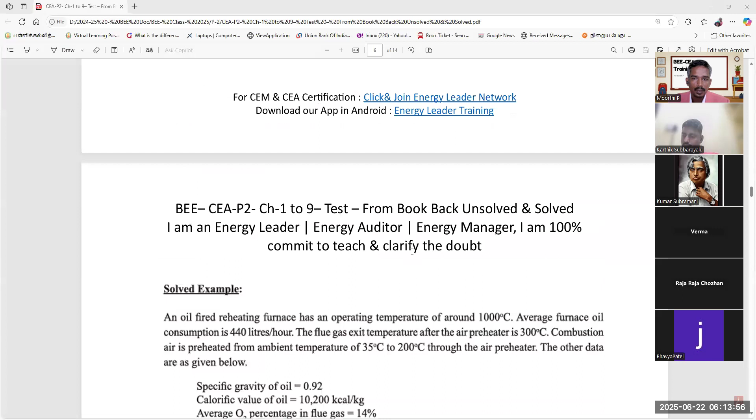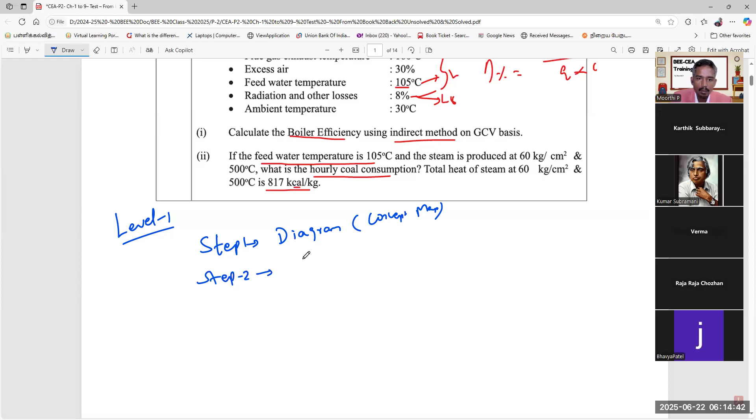Yes sir, yes. Step 1. When you read, we have to follow 3 steps. This is level 1. We have to create level 1, level 2. So step 1: diagram, that means concept map. Step 1, step 2. Mark the data. Step 3, write the whole formula.

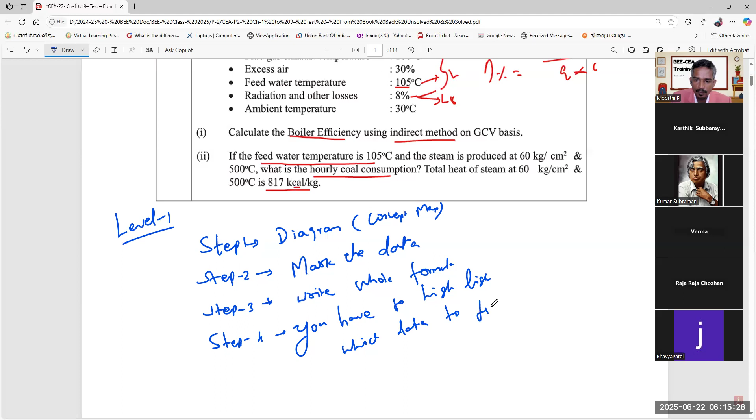Step 4, you have to highlight which data to find. This is level 1. Do you understand? You have to write the whole formula. Step 4, you have to highlight, no? You have to highlight which data to find. It's very important, no? The 4th step you have to follow. Level 1. So level 2, for each question, after once completed, level 2 is the second round.

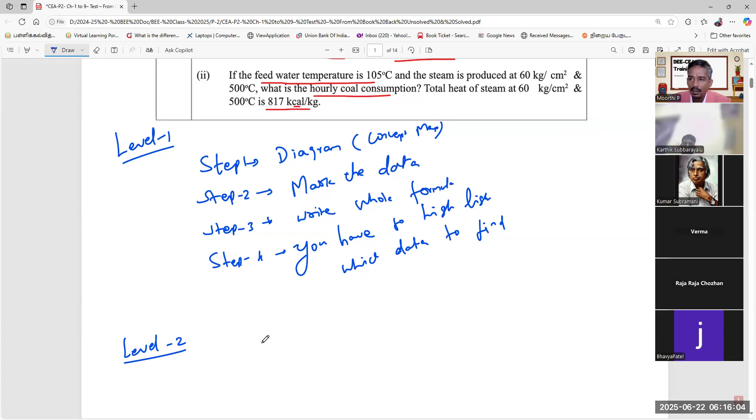You have to do, what do you have to do? Second round. Second round, what do you have to do? Using a calculator, do the calculation.

Step 5. First, you have to understand, to find easy data or which one is mandatory to find, to calculate the next process. Using the calculator, do the calculation to find easy data. Which one is easy? You can find it quickly. Or which one is mandatory to find, to calculate the next process, next step. We have to follow the next steps.

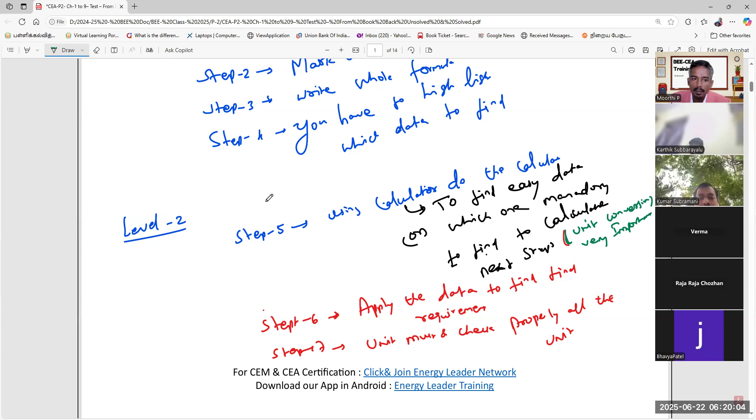So unit conversion is very important. Clear for level 1, level 2? Okay, first round, this is round 1, you have to follow this. Round 2, second time you have to follow, this is why I am telling you now. Once you do step 1, step 2, step 3, step 4, automatically you move to the next calculation. So what will happen? Your mind is always working on the next process. Do you agree with this? Your mind is always working on what we have to do next, other processes. Same thing keeps going on. So level 2, you have to do it. Level 3, I will do the calculation. If you can't find it, I will do that. Only level 1, level 2 each, you have to make it like this. Everything simple, make it simple. Clear? Okay, so I will explain the simple concept for each question.

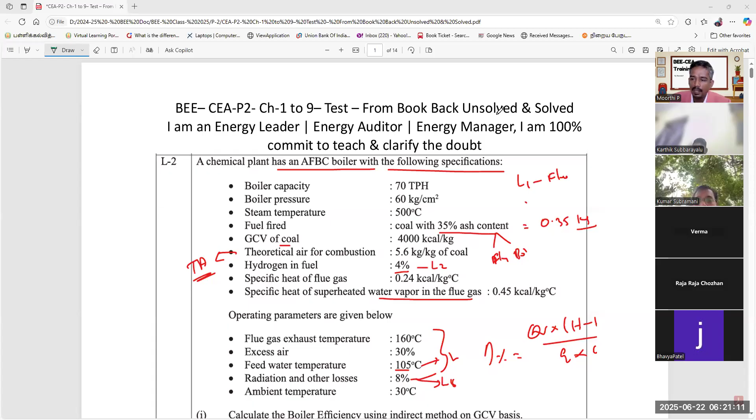Okay, this is already chapter 1 to chapter 9, this is a book calculation. I have already explained this one, so I will explain it again. The chemical plant available is an AFBC boiler with the following specification. What is the capacity? This is 70 tonnes per hour, means Q. This is the pressure, this is the steam temperature, no? The fuel fired has 35% ash content. Okay, they only give the ash content, they don't give any data for fly ash or bottom ash. Do you agree with this? So gross calorific value is given, theoretically, no, TA? Hydrogen in the fuel is given, no?

What do you have to find out? Anyone tell me quickly? Verma, Raja Raja Chozhan, Patel sir, Karthik. Hydrogen in the fuel, that.

Only we have to find out the hydrogen in the fuel. Okay, clear? Next one is the specific heat of flue gas, 0.24, and the specific heat of superheated water vapor, this CP. This CP is used for flue gas.

Flue gas, this is very important. You have to find out heat loss for flue gas. Operating temperature given na, flue gas exit temperature. Is that TF na? Yes, T is TA. Excess air given na, EA, percentage excess air.

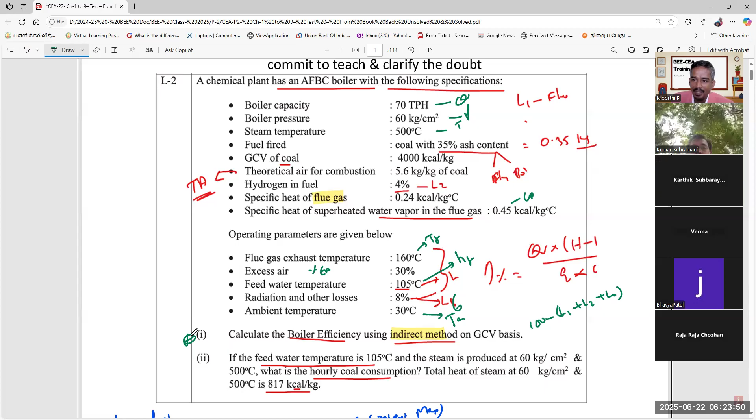Yes, they are asking, if you see the boiler efficiency, you have to find it. Simple calculation: if the feed water temperature is 105, same feed water temperature, and the steam produced is 60 kg per centimeter square at 500 degrees Celsius, what is the hourly coal consumption? The total heat of the steam, what is the heat of steam? 817 K calorie. What is the formula you have to apply na? Boiler efficiency = Q x (H minus HF) divided by Q x Gross Calorific Value.

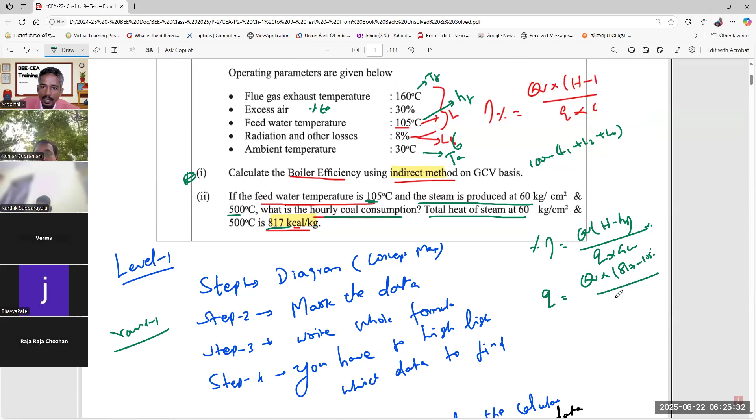So you find out na, indirect method boiler efficiency. Only they are asking Q. Clear? Yes, so Q steam, what is the steam? Q, this is Q na, 70 ton per hour. H is 817 minus HF, what is HF? 105. So divided by gross calorific value, how much? 4000 K calorie. Boiler efficiency, how much?

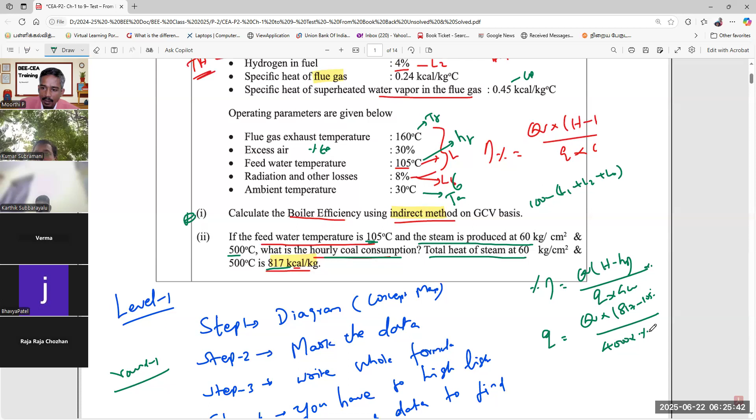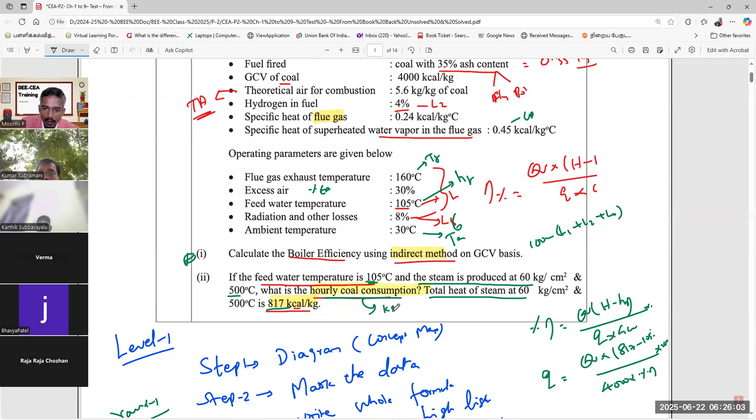Whatever value you get, you have to make it, okay, multiplied by 100, simple you can calculate Q. Okay, this is what is the main unit? Unit very important na, what is unit? What is the unit? Kg, kilojoules per kg, yes kg per hour.

Kg per hour, so because they don't give anything about operating hours. Okay, first question you can do it now quickly. Now you get clarification, yes sir. Okay, every time you have to reference. If you already know that, no issue, you have to make it very fast. Do you understand na, you have to make everything very fast.

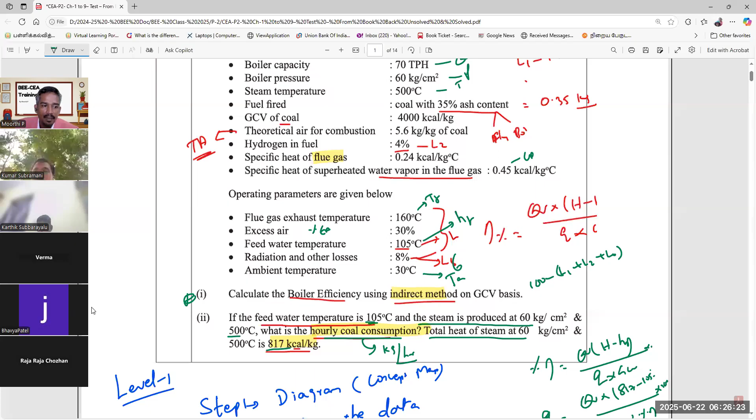So next question: the oil-fired reheating furnace has an operating temperature around 1000 degrees Celsius. This is a furnace na, correct. Okay, average furnace oil consumption 440 liter per hour. So once you read, what do you have to do? Conversion, what is the main point? So always remember, for every question, unit conversion is very important. What is important?

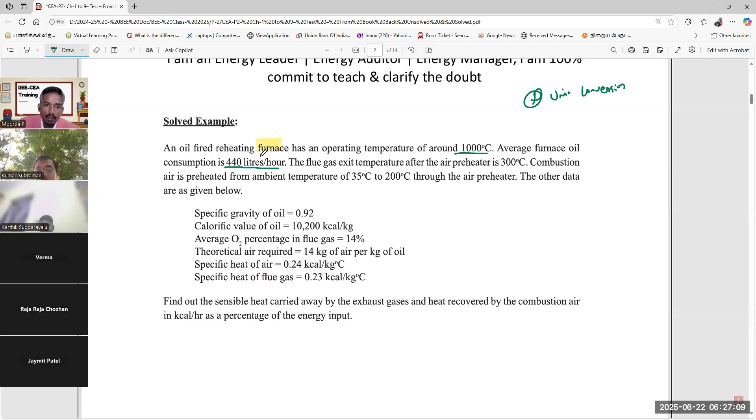What is important? Unit conversion. Unit conversion, now you understand na, you have to convert na. Convert, unit convert to kilogram per hour. Yes, multiply by the specific gravity. The flue gas exit temperature, air preheater. After the air preheater, what do they do? After the air preheater, so 300 degrees Celsius.

Okay, combustion: the combustion air preheated from ambient temperature 35 to 200 Celsius through the air preheater. Other data given, what are the data? The specific heat given, calorific value given, O2 value given, theoretical TA given na, TA.

So once you read the TA, what is the purpose of TA? Tell me quickly, what is the purpose of TA? To find surface heat loss. To find theoretical air, so what, to find the automatic...

Yes sir, theoretical air, what are the requirements? Everything you have to find out na. Theoretical, what is the main purpose? Once you read the theoretical air, this is where they use a simple equation using actual air supply na. The actual supply is used to find flue gas mass. So everything follows a sequence. So same with excess air, what is the purpose of excess air?

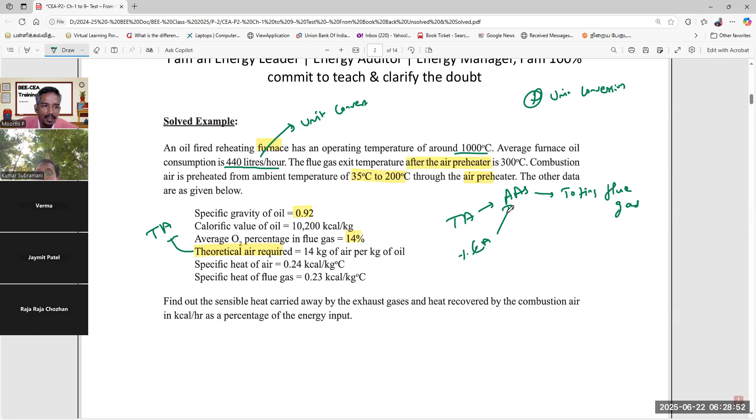First excess air. Once you read the excess air, what you have to understand? This is useful to find out the actual air supply. It is helping, both need help. Then only you can find out the actual air supply. Then going for to find flue gas.

Clear? The specific heat of the air. They given the air. Are you understand? They give separately air, flue gas. You have to understand 0.24, 0.23.

So find out the sensible heat. What is the sensible heat? Tell me quickly. See, everyone need to answer, very important. MCP delta T. Yes, what is sensible heat? A bit change in temperature that causes.

Yes, that means increase the temperature for air carried away by exhaust gas. So flue gas always giving sensible heat. Okay, next, heat recovered by the combustion air.

Find out the sensible heat carried away by the exhaust gas. They asking sensible heat carried away, and heat recovered by the combustion air, in K calorie. As a percentage, you have to calculate. How much percentage? Now clear?

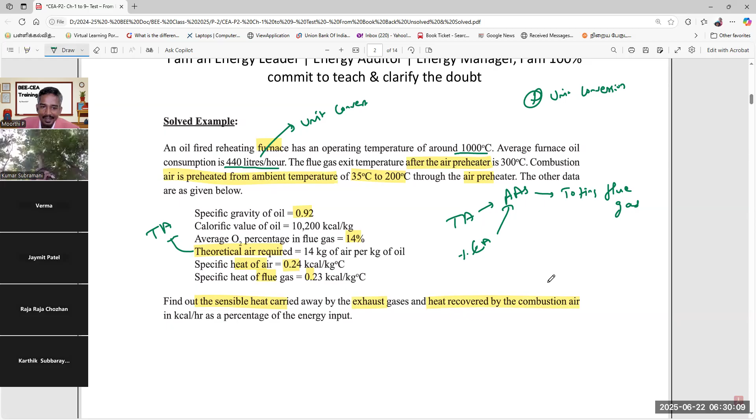How to calculate? Two things you have to calculate. What is the two things? One is sensible heat. So what you have to do? Draw the diagram now. So first step, what is the first step?

The one question I will explain. What is the first step? Draw the diagram. Draw the diagram. Yes. This output.

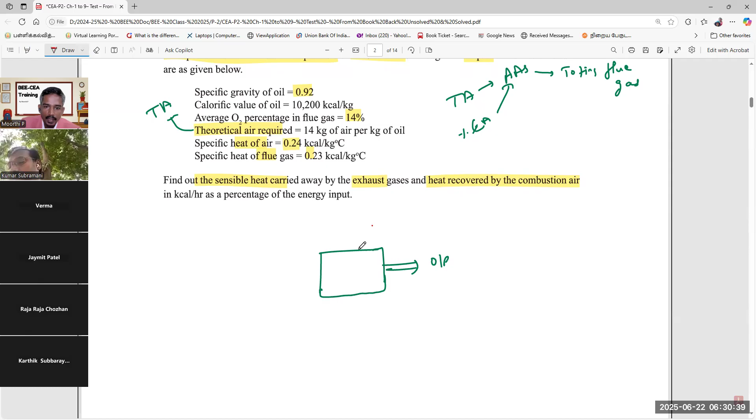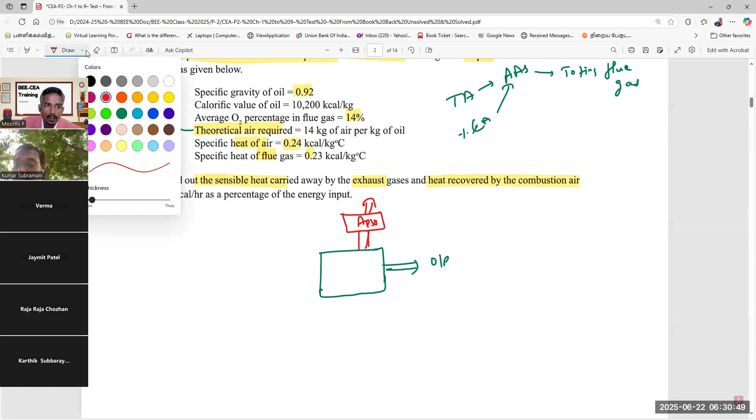This is a flue gas. This is a flue gas. Here is an air preheater. This is going out. The furnace, F. I am giving the fuel input now.

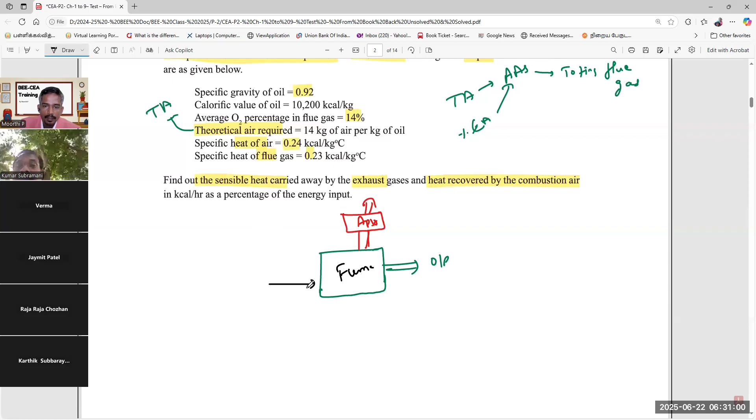First step, you have to draw before air preheater, after air preheater. Are you understand now? Okay. Before air preheater, after air preheater. It's very important. Before air preheater, this is after air preheater.

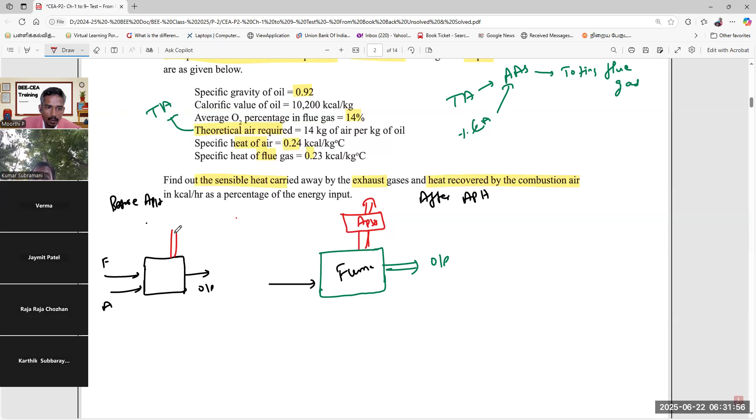The fuel, air, flue gas. What is the temperature? Operating temperature 1000 degrees Celsius, for the furnace. Yes, that means flue gas temperature how much?

Here? 300 degrees. Clearly you have to tell. Oil fired furnace operating temperature around 1000 degrees Celsius. 1000 degrees Celsius.

Inside 1000 means before air preheater. This is also 1000 degrees Celsius. Yes. Okay. Next one, what you have to do? After furnace, they install the air preheater.

This is data, but generic data. This is generic data. This we have to understand. They install the air preheater. They are giving the fuel. So output going on to air preheater. Now the temperature, the average furnace oil consumption is 440 liters.

The flue gas exit temperature after the air preheater, here is the temperature, how much? 300. Okay, this is TF. Any doubt? This is TF. It's after. So what do you have to make it?

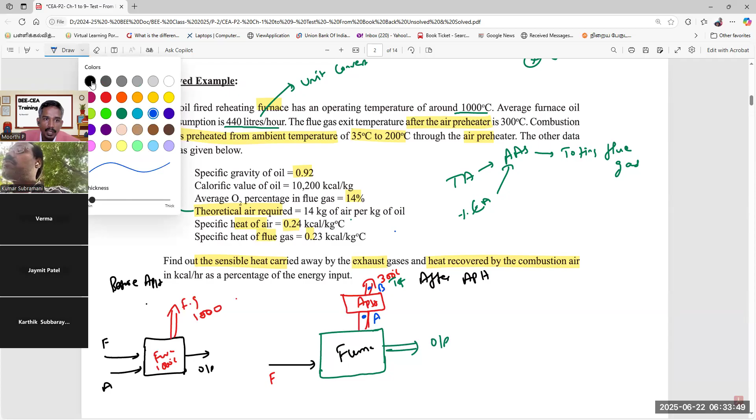What is the purpose of air taking? They are giving here, this is air. This air in, air out. This is also same, na? A point, B point like this. Potential difference, same like this. In, out.

So what is a flue gas? Now here both are mixing, na? Not mixing, the connection. What connection is available here? In the air preheater, flue gas and air connection available, the heat transfer available. Flue gas.

Heat loss equal to heat gain. So which one is the heat loss? Anyone tell me quickly? Already done this calculation, I explained. Flue gas is heat loss. Heat loss, flue gas. Heat gain, yeah.

Okay, what is the temperature of the combustion air? Preheated. How much preheated? 35 to 200. So what is it? This is T1, 35 degrees Celsius. What is T2? Here output 200. Okay, the other data given.

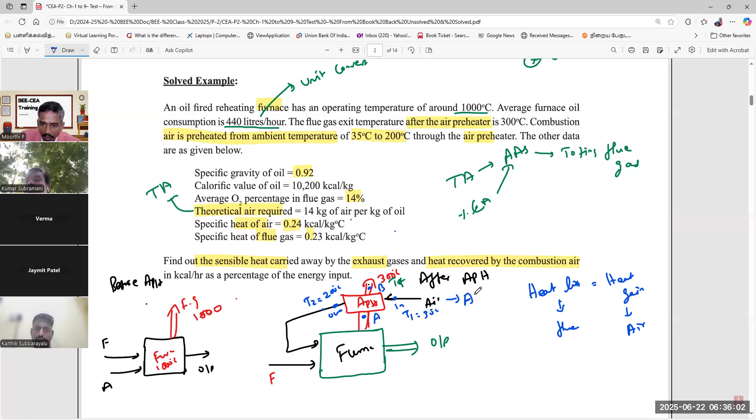Yes, here you need to find out mass of air. Are you understand? This is you have to find out the actual air supply. Here flue gas, you have to find out flue gas mass. Mass, MF, this you have to find out. MA you have to find out. Clear? Oil already did, na?

Already what is the oil? 440 liter per hour. This is what you have to do. Tell me quickly, kg per hour. Yes, kg per hour. To find out kg per hour, unit conversion, fuel conversion, kg per hour. Next, what you have to do?

This is data complete, na? Data, yeah. Step 1, step 2 completed. Level 1, step 1, step 2 completed. What is the next step?

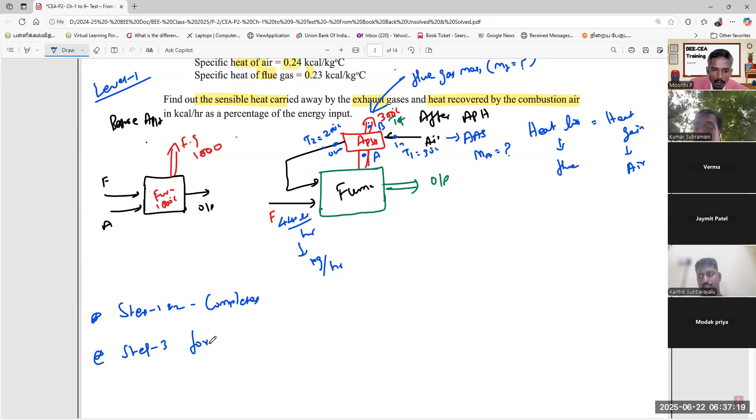Step 1, step 2 completed. Formula. Step 3, formula. So what is the whole formula? Just write whatever formula is available. Simple way: heat loss equal to heat gain. So air heat gain equal to M air into Cp into T2 minus T1, delta T. The simple formula: M Cp delta T.

So what is the other formula? For flue gas, you need to find the O2 and heat loss. MF into Cp into same delta T. Same, you can make it.

Here is a very important instruction, after the air preheater. This instruction says: find out the sensible heat carried away by the exhaust gas. How much carried away? Here 300 degrees Celsius. This is everything after preheat. So this is 300 degrees Celsius. What is the ambient temperature? That is distributed here. This is the loss: TF minus TA. This is after the air preheater. So in this case, one temperature has to be 1000 degrees.

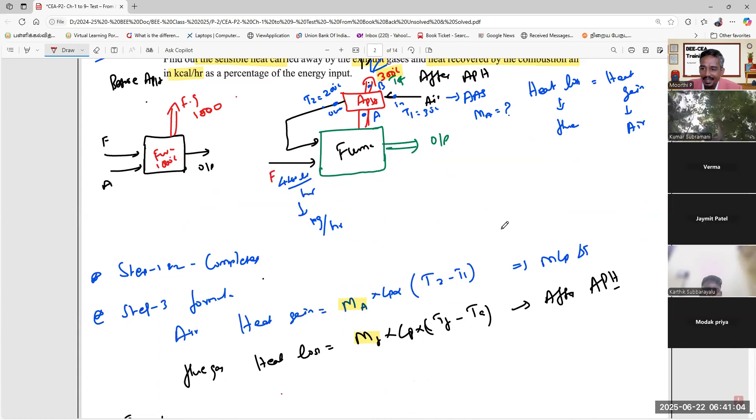Karthik, understand or not? If you understand, tell me yes. Otherwise, not understand - that also very important. Okay sir, just I okay, need to solve - only understood the concept, sir. Okay.

Okay, step 4, what do you have to do? Calculate the mass of air and flue gas. Yes, MA and MF, clear? MA and MF, how to calculate? Mass - so you've done a lot of calculation: theoretical calculation, actual air supply calculation.

The data already given is theoretical air. Yes sir. Then why are we getting, what is the mass of air? Actually, the supply is equal to theoretical air into 1 plus percentage excess air. Mass of air means the actual air supply. Clear? What is the meaning of actual air supply? Theoretical air into 1 plus percentage excess air. So percentage excess air - this is what we have to do.

Okay, what is the next one? Mass of dry flue gas. This is complete, na? Mass of dry flue gas, how to calculate? This is everything: actual air supply plus 1. This is everything for 1 kg fuel. So total mass of air, how to calculate total mass of air?

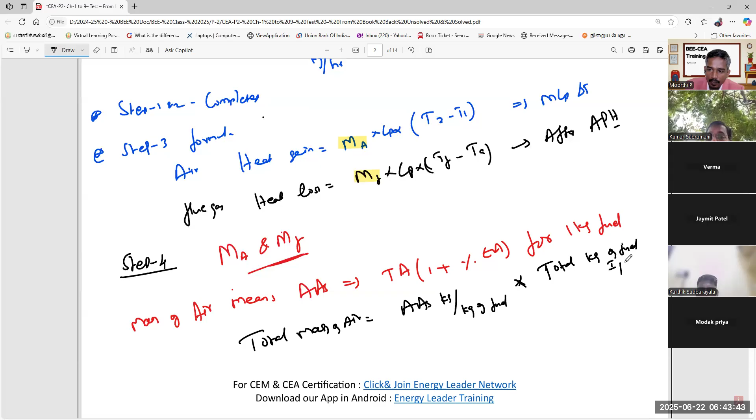Multiply by the mass of fuel. So actual air supply, kg per kg of fuel. Kumar sir, are you understanding that, sir? Kg of fuel. Sir, yes sir. And kg of fuel - total kg of fuel, fuel input. So next, what do you have to do?

Mass of dry flue gas. So how to calculate mass of dry flue gas? Total mass of dry flue gas equals 1 plus actual air supply. Mass of dry flue gas equal to: always remember, actual air supply plus 1, into total kg of fuel input.

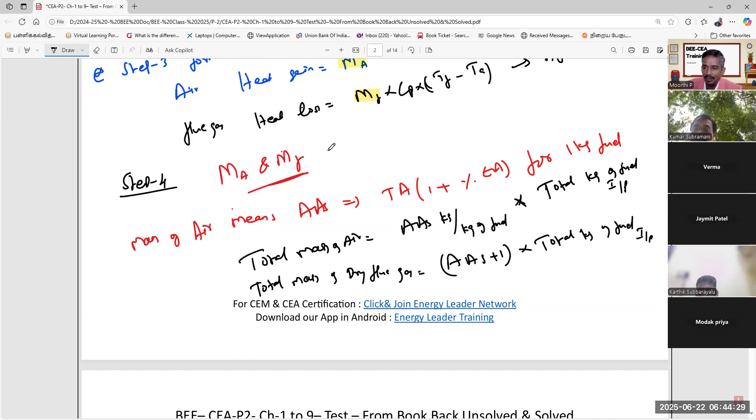Then next, what do you have to do? Difference - we have to find it. Simply you have to apply M Cp delta T, you have to calculate, and you have to find a percentage of energy input. Do you understand the percentage of energy input? How to calculate the percentage of energy input? What is energy input?

Q into GCV - yes, this is energy input. How to calculate the percentage? Any idea? Difference divided by input - yes, the percentage of heat loss, heat gain for air equal to heat gain divided by input energy into 100. This is the simple calculation for both.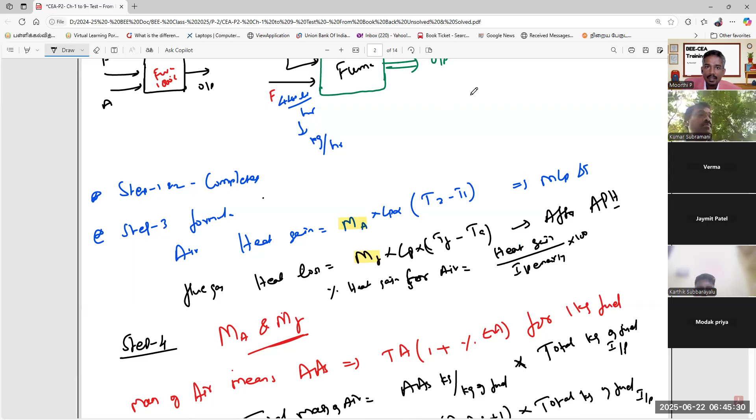Now finish everything. If you understand what is the flue gas, what is the theoretical air, what is the actual air supply, then only you can easily understand, clear. If you understand how to find the actual air supply - theoretical air, they already gave theoretical air, no need to find out now. Modak, do you understand?

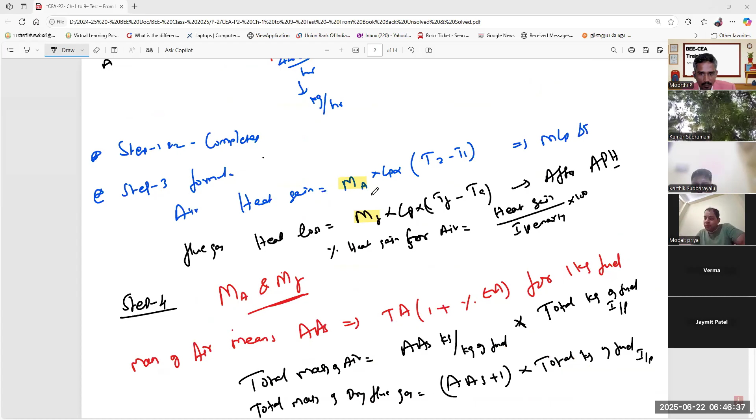You have to find out everything. Yes, so next calculation. Sir, one thing I want to ask, just a doubt. For finding this flue gas MCP delta T, what will be T1 and T2? 1000 degrees and 300 degrees?

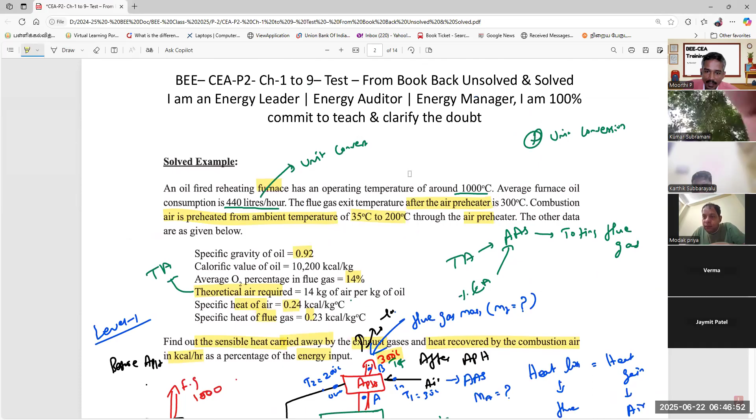Already they have mentioned how much carried away. They mentioned clearly, carried away means by flue gases, by exhaust gas. What is exhaust gas? Flue gas, na? Okay, so what is the carried away?

What is the ambient temperature? 35. Yes. What do you have to do? Carried away is the difference between carried away temperature minus TA, na? Directly going to mixing with the air.

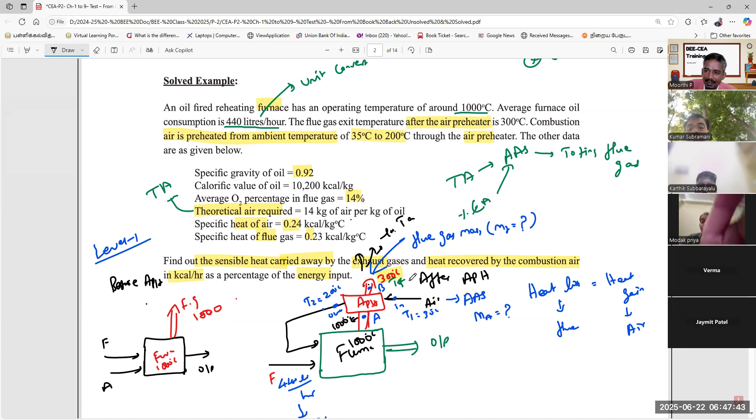This is air preheater. This is flue gas, temperature 300 degrees Celsius. This is directly mixing with air, na? Ambient air, this is TA temperature, so 35 degrees.

35. So why this? Both are mixing, what will happen? Energy loss, na? So why is this 1000 degrees Celsius given?

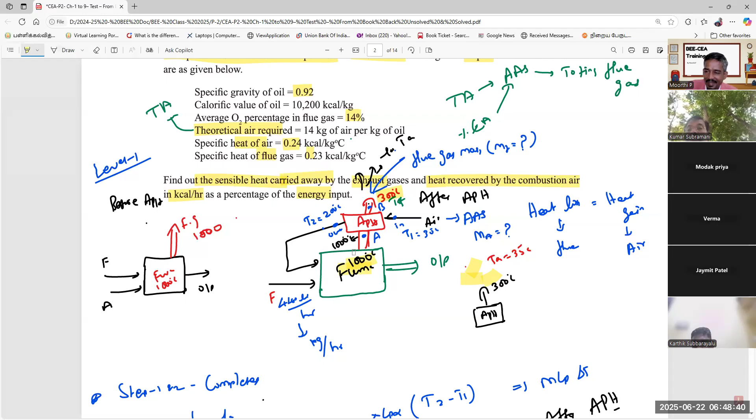They already told, na, furnace operating temperature is 1000. I mentioned here inside, operating temperature. You have to read the question paper: oil fired heating furnace has operating temperature around 1000 degrees. What is the meaning?

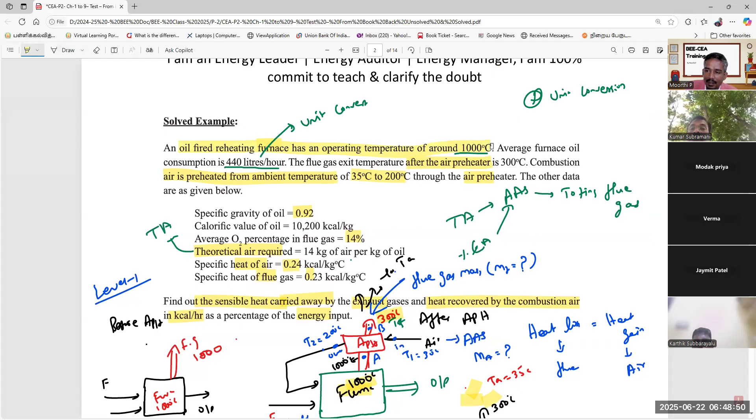The inside temperature is 1000 degrees. Furnace operating is 1000. Here the coming flue gas is 1000. We are inside the air preheater. Then after the air preheater, it exits at 300 degrees Celsius.

This is carried away. If you consider before air preheater, without air preheater, you can find out how much energy loss by carried away by flue gas.

1000 minus - without air preheater, what is the flue gas that carried away? 1000 minus ambient air temperature. Here you mention how much flue gas carried away.

Understood. What I was thinking, sir, I have to minus 1000 minus 300. How is this possible? Because they mentioned air preheater. They didn't mention anything - find out sensible heat carried away by the exhaust gas. They don't mention anything? No.

Yes sir, tell me sir. In both cases, T2 minus T1 is also considered as 35 degrees centigrade, because of 300 minus 35, and 200 minus 35. For the air preheater, after preheater we consider delta T equal to 200 minus 35, and before APH we consider 300 minus 35.

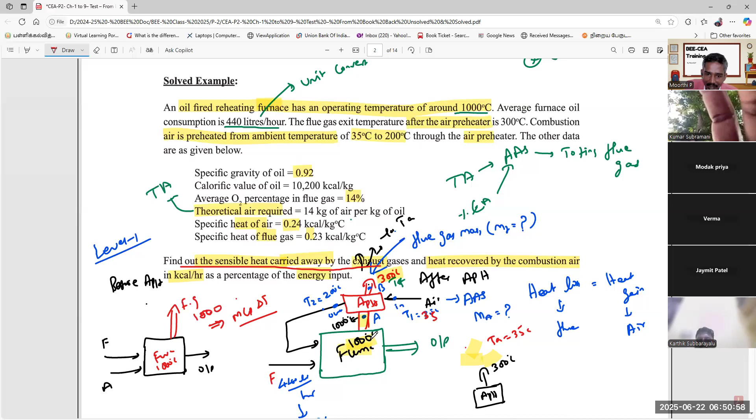Here inside, you understand, this point is very important. You make the point that the inside temperature is the 1000 degrees. This is before air preheater - how much temperature? 1000, na? Okay, you have to draw the diagram.

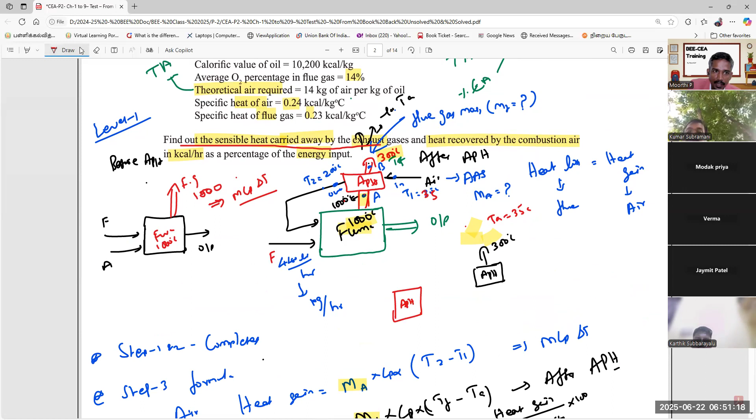What is the diagram? This is air preheater. Can you see the screen clearly? Yes sir. So this is flue gas in, na? This has 4 points available.

This is 1 main input. This is air input 1. Same like boiler - here flue gas input, output 1. This is air output 2. Clear? Any doubt?

What are the points? Simply you have to mark points A, B, C, D. Clear? The air temperature, how much? Ambient temperature 35, na? So what is here before air heater? What is temperature of flue gas? This is flue gas, 1000, na? Clear? Understand?

Here how much temperature? 300. Here temperature how much? 200.

Suppose, what is the main thing? Suppose they don't give anything to find out the mass of air, then you can use the heat loss equal to heat gain formula to find out mass of the air. Do you agree with this? Already we have done this, na? Heat loss equal to heat gain. So this point is very important.

They already mentioned theoretical air, so you have to find out the actual air mass. What is the main thing you have to find out? In both cases, you have to find out. Which one do you have to find out? Both cases - in both cases, what do you have to find out?

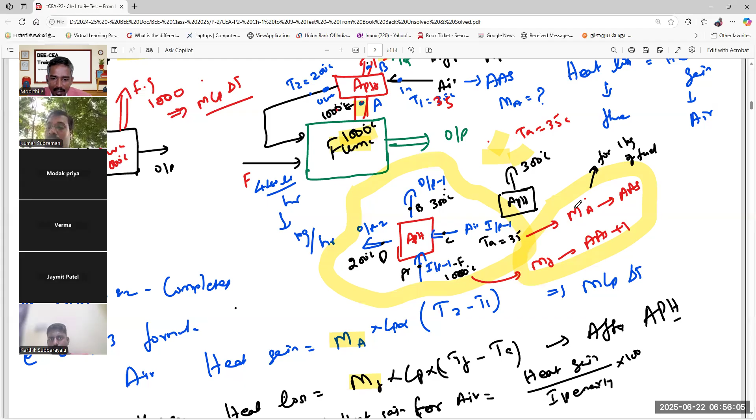Do you understand? Yes. Once you draw the diagram, data, and do the calculation, conversion, everything, you start with this one. See, everything is about action only. If you just see the same thing after 1 day, after 2 days, after 3 days, you always get confused. What is the reason?

You are not doing, just seeing. Yes, just seeing the things creates a mess. So doing the things makes everything very easy. Yes, sir, so what is the main purpose? What do you have to do? Simply you have to follow the 4 steps.

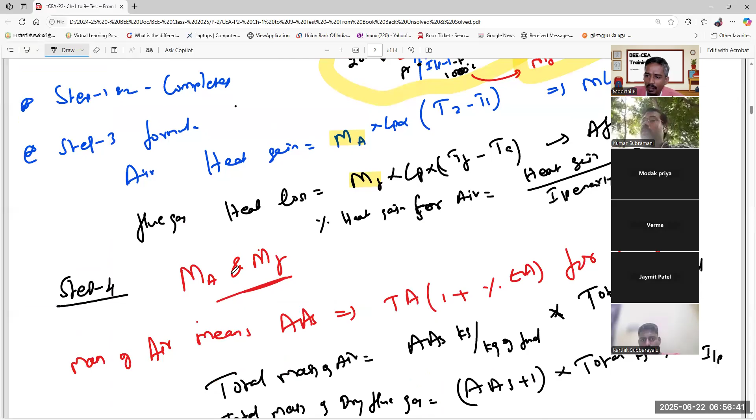Okay, step 1, step 2, step 3, step 4. Just leave it, automatically your mind will find out. So don't think too much. Everything is simple calculation. What is the simple calculation? See, same mass, heat loss equal to heat gain, simple formula.

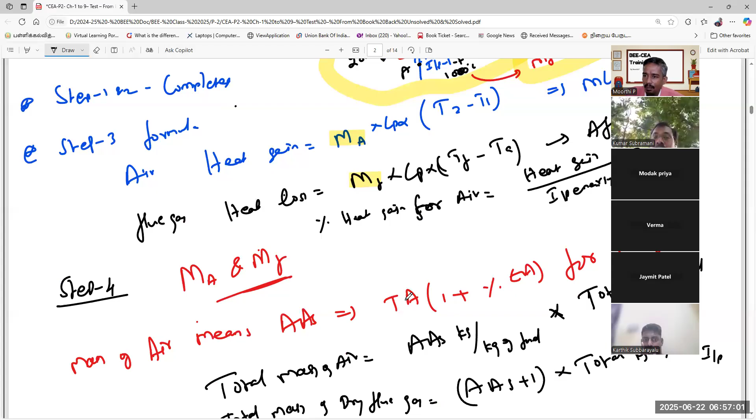Already you know how to calculate the actual air supply. This actual air supply is for 1 kg of fuel. You calculate it for total kg - total kg of fuel, how much? 440 into 0.92. And then you multiply.

What is the flue gas? It will increase, plus 1. Say actual air supply plus 1, into 42, that is plus 1. Finish - yes, that is finished.

After that mass, this is what is MCP delta T, MCP delta T. They are asking the energy input percentage value. Then they divide everything - that is a very easy calculation. This is a 10-mark calculation.

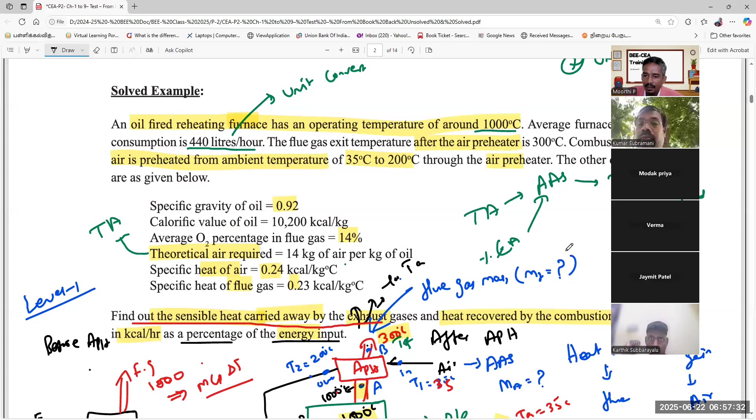Yes, sir, so you have to do. But sir, my question is - work out. Sir, my question is, we find out the two - sensible heat loss carried away by the dry flue gas. At that time, we consider 300 minus 35.

Yes, sir. Heat gained by the preheater - heat gained by the preheater, meaning heat absorbed, air preheater input air preheater. We have considered 200 minus 35.

Yes, sir, so in both cases, when we find out the MCP delta T, at that time we have considered M is equal to 42 multiplied by 405. At that time, consider 165, and specific heat 0.24.

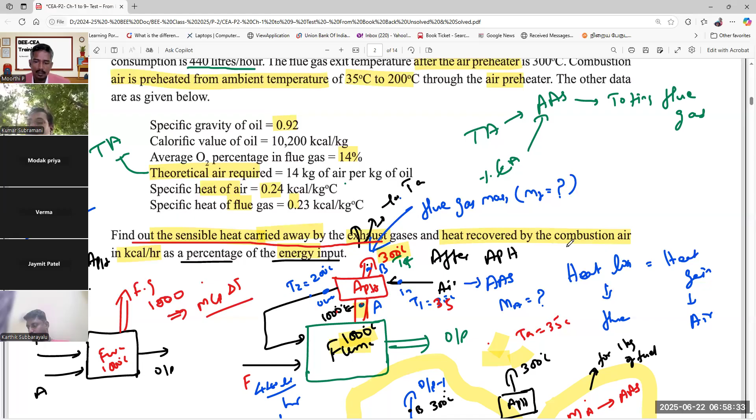Cp is 0.24, and 200 minus 35 in the first case, and sensible heat loss carried away by the dry flue gas exhaust - we have to consider temperature difference with 35, and the same is considered as 35 with 200. Yes, ambient temperature is always common, sir. This ambient temperature always mixes with ambient.

Okay, so this is common, already. So what is the other doubt, sir? What is the doubt, sir? Doubt is 1,000 degrees - why, where do we utilize 1,000 degrees?

Sir, the mentioning is the furnace operating temperature, generic data. Okay, suppose the question asks how much heat loss without air preheater - without air preheater, without air heater, yes, without air preheater. At that time, delta is 1000 minus 35.

Yes, sir, okay. If we are not utilizing the APH, at that time we consider 1000, delta T is equal to 1000 minus 35. Yes, without air preheater, they mention it in the question. Okay, I got it, sir.

Yes, you understand? Without - if here nothing is mentioned, find out the sensible heat carried away by the exhaust gas. Exhaust gas, yes.

Okay, they don't mention anything about installation, nothing. The reheating furnace average temperature, everything, average oil fuel - the flue gas exit temperature they mention is after the air preheater.

Yes sir, the combustion air preheated from ambient temperature, ambient temperature 35 to 200. Why did I mention 200 degrees Celsius here? It will not be used. Wait, let me complete. Why I mentioned air preheater without air preheater - you have to understand this.

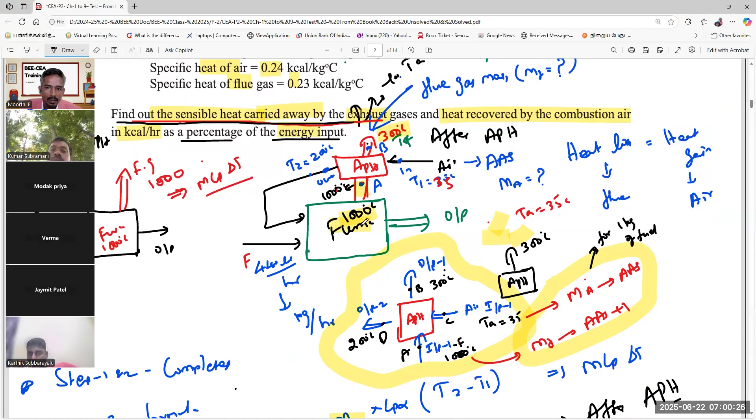Yes sir, okay, otherwise another question they'll ask like this. Any doubt? No sir. Clear it, okay, tell me Verma quickly. This 200 degree Celsius will not be of any use in the calculations - we have to calculate by 1000 degree and 300 degree.

Why are you messing up every time? What is the problem, clearly tell me. 200 - do you understand 200? They mentioned data, air preheater, 200 minus 35. What is this data they have given?

Air, no? Yes, this is air, already mentioned here, no? 200.

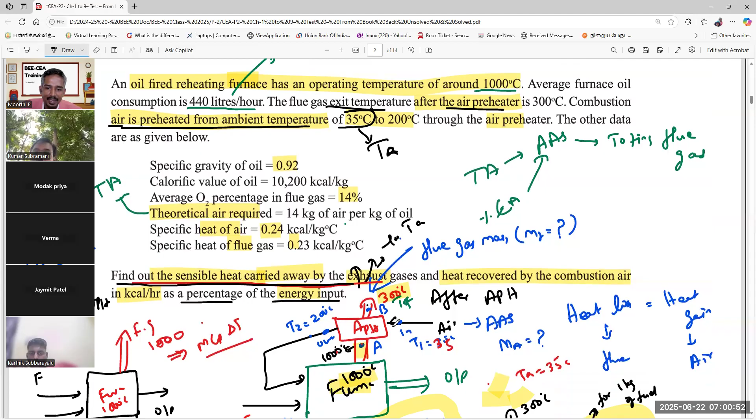Verma, I am asking you Verma, you asked the question. Yes sir, what is the next question? They mention here also, air preheater. After air preheater, flue gas also mentioned 300. Here 300, no? It is 200.

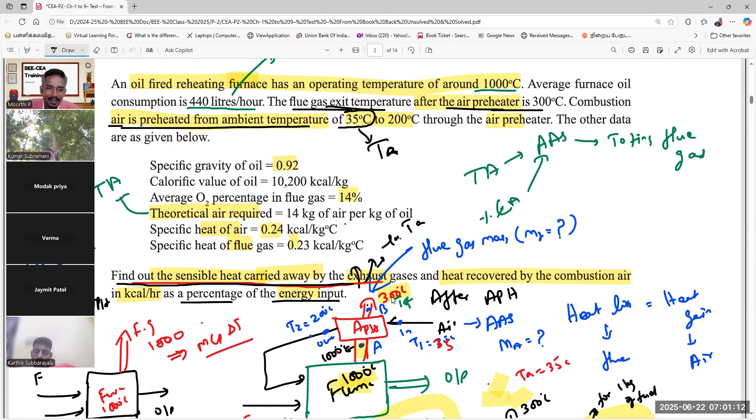Yes, so data is given clearly. You have to draw the diagram clearly. Yes, first of all okay, so what you have to do - you have to make the diagram. Every time you have to make the diagram.

Okay sir, okay, next one is this question you have to follow. What is the efficiency of billet heating furnace with an output? What is the output - they mention output. What is the output? Every time you have to make it into a box.

This S2 - what is the box? This is a box, no? Yes, this output, how much? 15 ton per hour.

What do they mention? Efficiency - this efficiency I mentioned, 32 percent. 32, find out specific fuel consumption liter per ton. What they mentioned - the specific fuel consumption, this is very important, 1 mark they allot.

So any material, any furnace, taking specific fuel consumption, liter per ton of billet heating. What is mentioned? Billet heating - how much billet heating? 15 ton, are you understanding? Yes, 15 ton, and total fuel consumption per hour.

Q - so okay, so initial temperature how much? Initial temperature here is the material, no? Input - yes, what is initial temperature? 50 degrees Celsius - here increase the temperature.

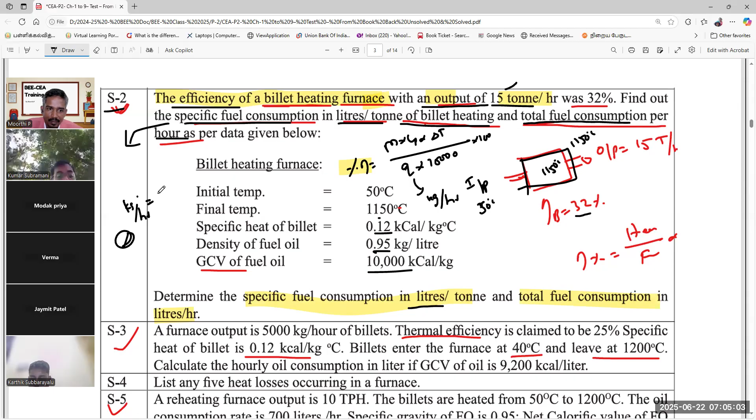How does density convert - they give liter per hour? So what is the kg per hour formula? Specific rate, liter per hour, kg per hour - kg conversion always.

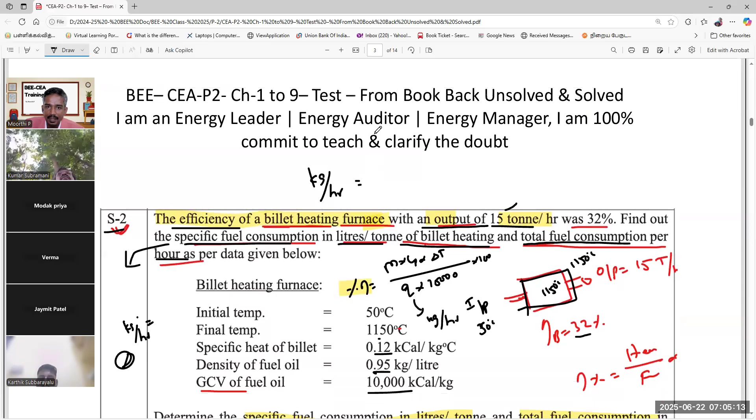Liter per hour multiplied by specific gravity - yes, here mentioned density, density multiplied by density. Here simply, how much liter per liter they given - so you have to find out liter. So first value is liter per hour. Simply you have to write liter per hour into this, into or divide.

This is very important - into or divide, into or divide. Which one you have to use? Right.

Liter per ton divided by 1000. For the divided unit here, you always understand kg per hour. It is coming kg per hour on the top side. Yes, density also kg per liter coming on the top side, so you have to multiply. This is very important, density.

If you don't understand, you have to understand the unit liter per hour. So what is going to cancel? Liter cancel, liter cancel, then kg per hour available. This is unit conversion, okay.

Now they are asking liter per hour. So liter per hour, what do you have to do? Need to divide it. Liter per hour equal to kg per hour divided by density.

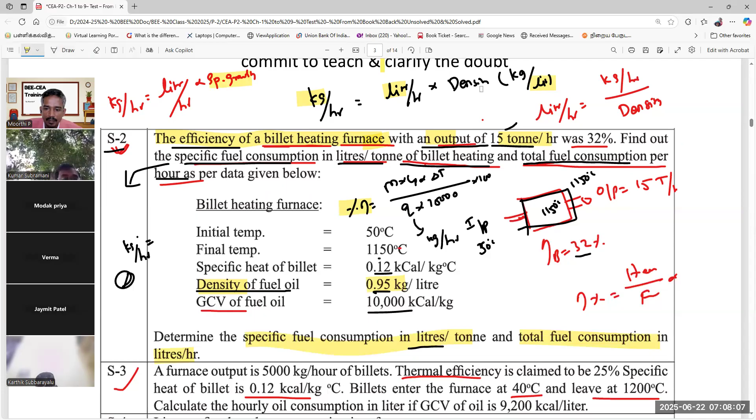Okay, next is S3. What is S3? Furnace output 5000 kg per hour of billets. Here is the furnace output, how much, 5000 kg per hour billet. Thermal efficiency is given 25%. Specific heat of the billet 0.12. Billet enters the furnace at temperature 40 degrees, same 40, at leave 1200. Calculate the hourly oil consumption in liter. They are asking liter. Gross calorific value of oil 9200 kcal per liter.

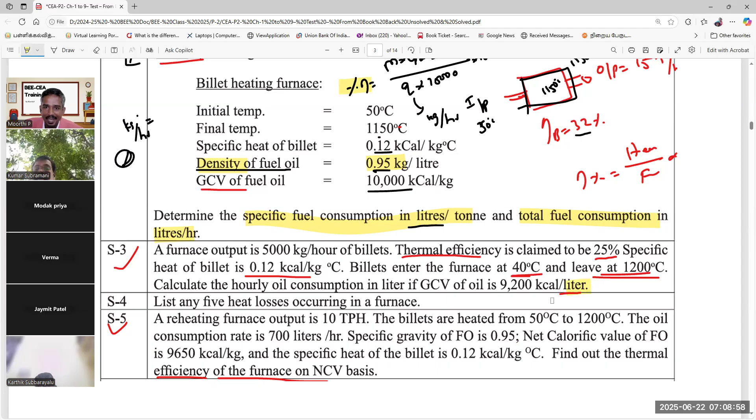They given the liter, are you understand? Yes, they given the liter. Here, what is the unit here? Gross calorific value per kg. So here they use the kg, so you use everything in kg. Now they are using liter, then what do you have to do? I have to change kg per hour to liter per hour. So directly you can apply.

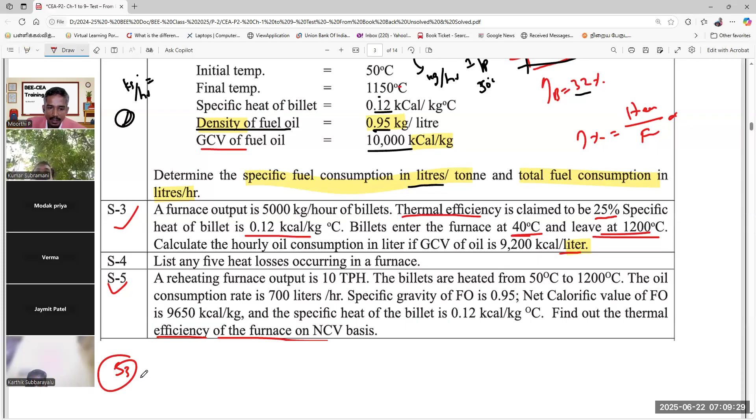Yeah, for S3, what do you have to do? So you understand the box, what is the diagram, everything? Understand, it's 25% efficiency.

What is the 5000 kg per hour material, this is how much going on here? Same 5 kg. What is temperature? 1200 degree. What is the temperature entering? 40 degree, 40 degree to 1200 degrees Celsius. So 25% efficiency, they are asking how much oil consumption in liter per hour.

So what is the formula for efficiency? Same efficiency, heat input divided by M into Cp into delta T, delta T into Q into gross calorific value into 100. Here on the bottom side, always they ask liter, na? They are given the data as liter, so always use liter.

So what is the efficiency? 25%. So you have to multiply 5000 into Cp, how much? 0.12 into what is the temperature difference? 1200 minus 40. Here Q, Q is liter per hour. Gross calorie also liter per hour.

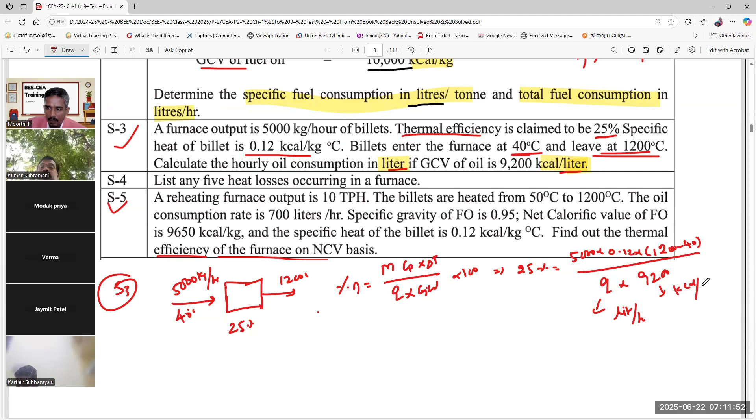Liter per hour, so you keep it like this. Then what is the unit? Here unit, what is the unit? This is kg per hour, liter, this is liter, liter per hour, this is also liter per hour. So that you are using liter per hour. Yes, kcal per liter. So now you can find out Q easily.

Any doubt on this one? No sir, no. So next one, reheating furnace.

Reheating furnace output 10 ton per hour, billets are heated from 50, same concept. The oil consumption 700 liter per hour, the specific gravity given, net calorific value given, the specific heat of billet given. Find out the thermal efficiency. Simple formula, same formula you have to apply. Clear this one? Simple calculation.

Are you okay? Not okay? Hello. Yes sir, yes. Kumar sir, Modak, are you available? Verma sir? Yes, Verma sir, available or not? Karthik? Available sir, available.

Yes, now clear this calculation, simple formula. Sir, my confusion is in some questions they mention GCV and some questions they mention NCV. And GCV formula from chapter number 1 we know very well, but they mention NCV. So which data should we use?

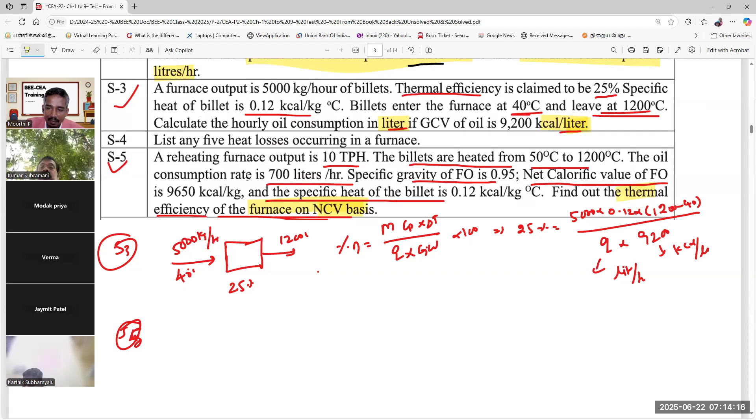They mention or not? So that's one. Yes sir. Now they mention clearly, so no need to confuse. Every data they give clearly. If only they give net calorific value, there also mentioned, find out the thermal efficiency of the furnace on net calorific value basis. Okay sir, every data they give clearly without any doubt. Don't get any doubt. So don't think there's no need. You have to make it, whatever the data given, you have to make it.

Now everyone clear? Yes sir. Yes, Verma.